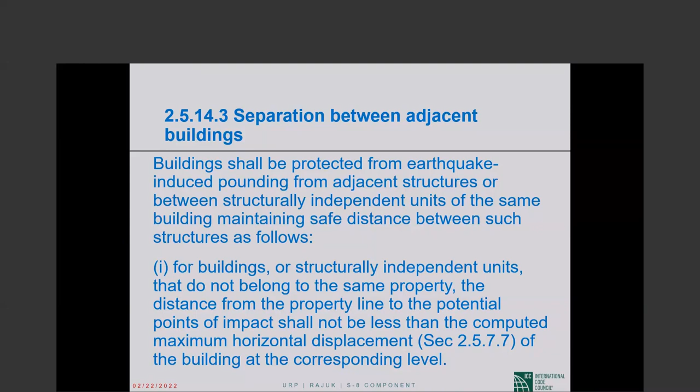The second item, for buildings or structurally independent units belonging to the same property, if the distance between them is not less than the square root of the sum of the squares of the computed maximum horizontal displacements of the two buildings or units at the corresponding level. So this is exactly the same as ASCE 7-10. Separation distance is square root of the sum of the squares of the deflection at the roof level of the shorter building and the deflection at the corresponding level of the taller building.

Now, this square root of the sum of the squares concept is in BNBC ahead of ASCE 7-10. I wanted you to see that. And once again, we are not talking about delta sub M1 of ASCE 7, including torsion. This is the horizontal displacement. It may not include torsion.

Then there is what I found the most interesting, and the reason that I thought that I had to show all of this to you is item number 3. If the floor elevations of the building or independent unit under design are the same as those of the adjacent building or unit - okay, please let me read that again - if the floor elevations of the building or independent unit under design are the same as those of the adjacent building or unit, the above referred minimum distance may be reduced by a factor of 0.7.

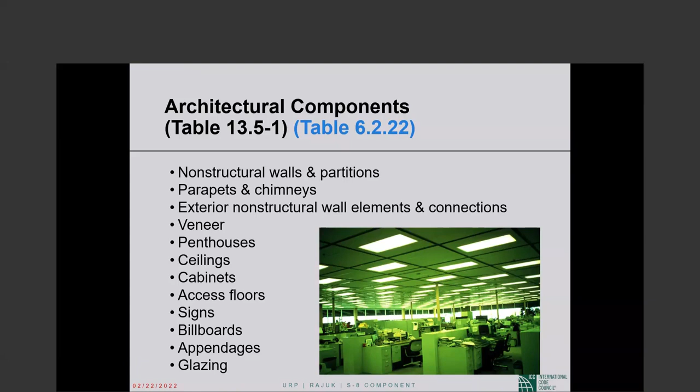The architectural components listed in Table 13.5-1 of ASCE 7 are listed because their design requires factors given in those tables. So these will give a good idea of what we're talking about: non-structural walls and partitions, parapets and roof-mounted chimneys, exterior non-structural wall elements and connections, veneer, penthouses, ceilings, cabinets if attached to the structure. Otherwise they're treated as furniture, which is typically not considered a non-structural component — it's when they're attached to or braced against the structure that we consider them. Also access floors, signs, billboards, appendages of various kinds, and glazing or glass, a very important architectural component.

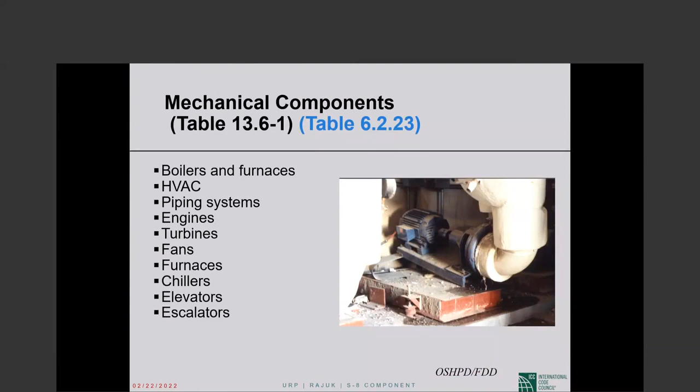Mechanical components are listed in Table 13.6-1, a very important table: boilers and furnaces, HVAC — heating, ventilating, air conditioning — which could be ducts, equipment, piping systems, engines, turbines, fans, furnaces, chillers, elevators, escalators, all of that are mechanical components. Electrical conduits, bus ducts, cable trays, and lighting fixtures are electrical components.

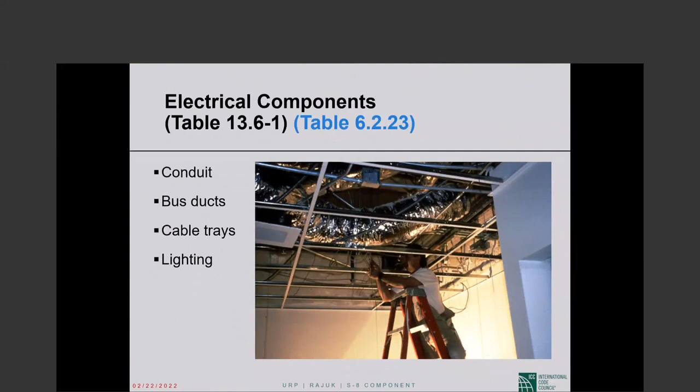For the purposes of Chapter 13 of ASCE 7, non-structural components shall be assigned to the same seismic design category as the structure they occupy or to which they are attached. So very simply, the seismic design category of the non-structural components is the same as that of the structure.

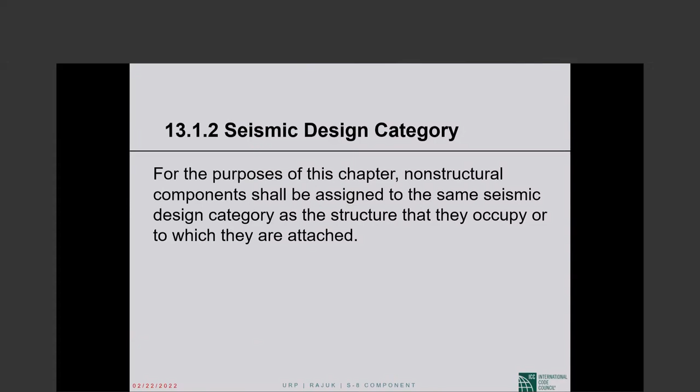Now, at the beginning of chapter 13 - and the same is true in BNBC, where it is 2.5.15 - there are a number of exemptions.

That's pretty much where the chapter starts, where the requirements do not apply. And that is a very important list, because it is only the other non-structural components that you need to design using chapter 13. So there is, to start with, a list of non-structural components that need not be designed using chapter 13 of ASCE 7, or 2.5.15 of BNBC 2020. This section establishes minimum design criteria for non-structural components that are permanently attached to structures, and for their supports and attachments.

So this is non-structural components permanently attached to structures - this is not furniture, as I said - and for the supports and attachments of those non-structural components. If they're attached to the structure, the attachment has to be designed.

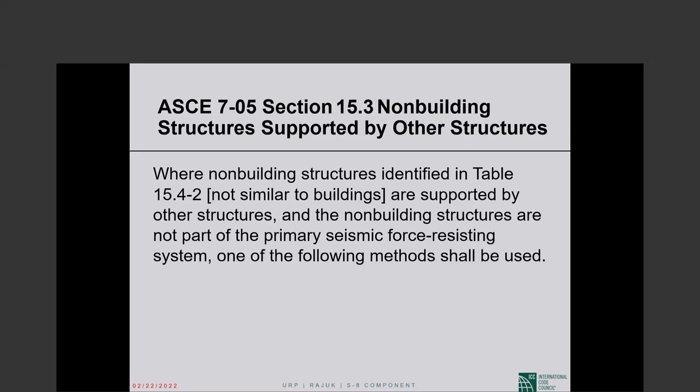So where non-building structures that are not similar to buildings are supported by other structures, okay, could be a chimney, and the non-building structures are not part of the primary seismic force resisting system, then one of the following methods shall be used. I'll take you only through the first part. The second part is a little too complicated, and I'll leave it to you to read if you're interested.

For the condition where the weight of the non-building structure, so we are talking about a non-building structure supported on another structure, is less than 25% of the combined weight of the non-building structure and supporting structure. Okay, this is the important part. Where the weight of the non-building structure is less than 25% of the combined weight of the non-building structure and supporting structure, the design seismic forces of the non-building structure shall be determined in accordance with Chapter 13.

See, this is where it sends you. Chapter 15 sends you to Chapter 13, where the non-building structure has a weight that is less than 25% of the combined weight of the, okay. So shall be determined in accordance with Chapter 13, where the values of R sub P and A sub P shall be determined in accordance with Section 13.1.5, which we looked at.

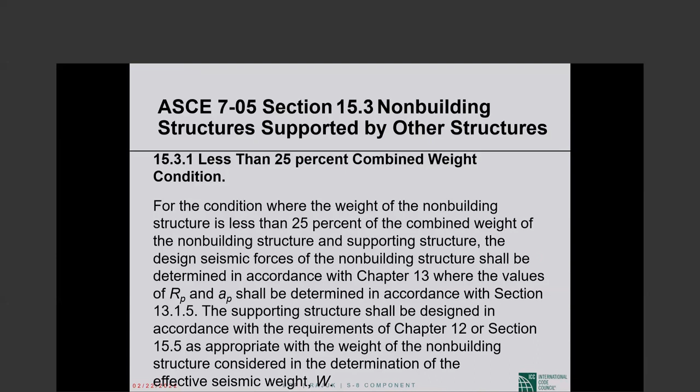Okay. Anyway, the rest of it may or may not be all that terribly important, and I will not take you through the case where the non-building structure weighs more than 25% of the combined weight.

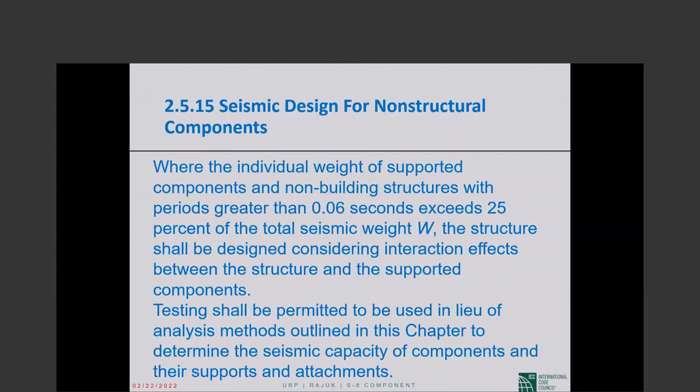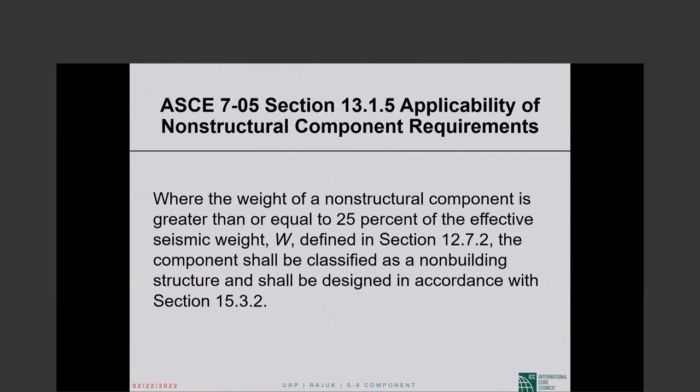So where the non-building structure weighs more than 25% of the combined weight, I will not take you through that, but there is provision for that. So I wanted you to see that, instead of this vague provision in BNBC 2020, ASCE 7 has very clear, distinct provisions for both non-structural components and non-building structures. And these are kind of interrelated, okay? I think that's probably enough on this topic.

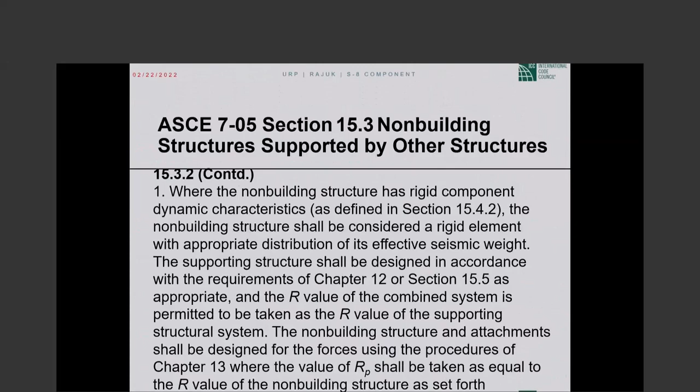But this is the exemptions are very important, and what I just took you through is also very important. You cannot start designing a non-structural component without figuring out if it is exempt, because then you'll be wasting time. And also you cannot start running numbers until you have figured out some of the things that we discussed. Is the non-structural component too heavy? In which case we may have to go to chapter 15 for our design, not chapter 13. Okay.

With those things settled, let us get into chapter 13, the non-structural component design chapter. So if you consider the exemptions, then what that leaves for us to design are parapets in design category B, all parapets, and architectural components in design category B when I sub P is larger than 1.

Okay, so in seismic design category B, the only architectural components that we need to design by chapter 13 are parapets and architectural components with I sub P larger than 1. If the design category is C, all architectural components must be designed by chapter 13. Electrical and mechanical components must be designed, but only if I sub P is larger than 1.

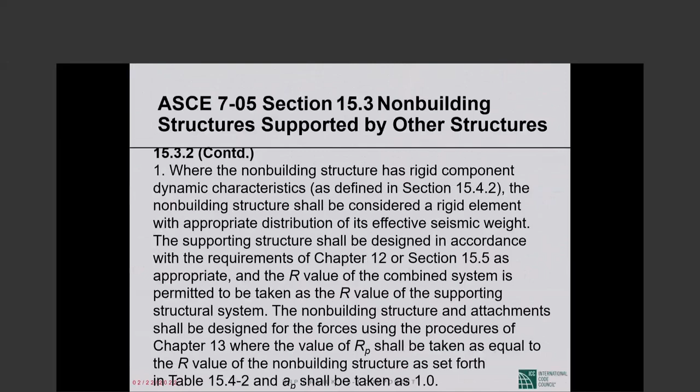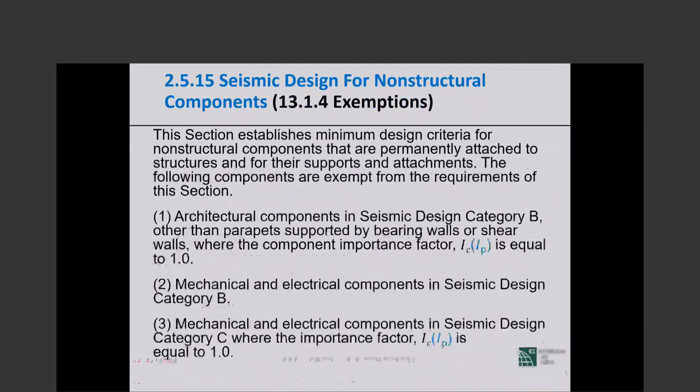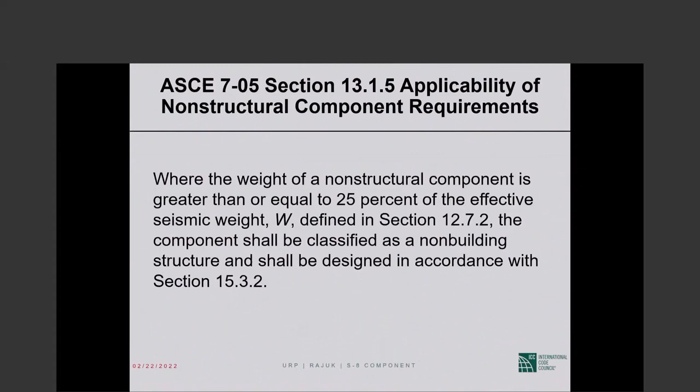Design categories D, E, and F: architectural, mechanical, electrical, all non-structural components basically always shall be designed by chapter 13. We say basically always because there were those exemptions 4 and 5, remember? These exemptions are there for the high seismic design categories, but those are not broad exceptions, those are kind of narrow. So this is why we are saying basically always.

So design category B, parapets have to be designed using chapter 13, other architectural components provided I sub P is larger than 1. Design category C, all architectural components, electrical, mechanical only when I sub P is larger than 1. Design categories D, E, and F, basically all architectural, mechanical, electrical components.

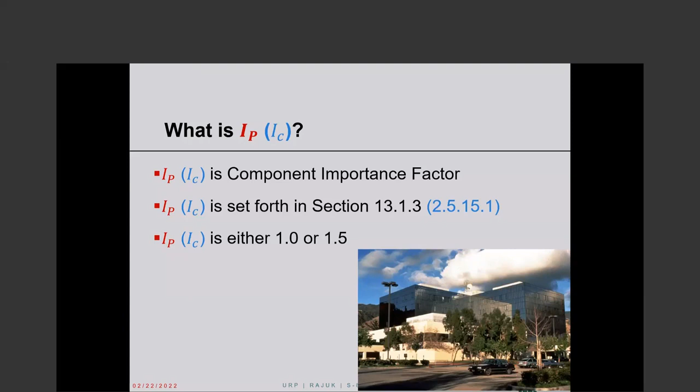Now the I sub P that keeps on coming up. Okay, I sub P, as you have seen, is very important. It dictates many times whether we have to design a component by chapter 13 or we can forget about design. So I sub P is component importance factor. It is given in section 13.1.3 of ASCE 7. I have given you the corresponding BNBC section number. I sub P is either 1 or 1.5. I for the structure can have 3 values, 1, 1.25, or 1.5. I sub P for parts and portions has only 2 admissible values, 1 or 1.5.

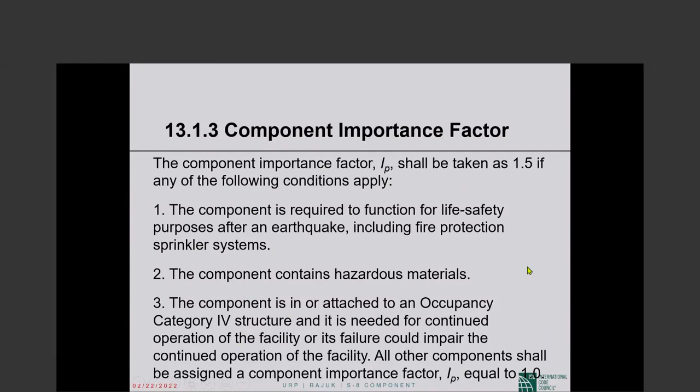And is needed for continued operation of the facility, or its failure could impair the continued operation of the facility. Okay, so 1, 2, 3, I sub P shall be taken as 1.5 if any of the following conditions apply. All other components shall be assigned an I sub P of 1. So I sub P is 1.5 when those conditions are met. It's not exactly essential facility, but the component is needed for continued functioning of a facility. The language is clear. Otherwise, I sub P is equal to 1.

What force do you need to design a component for? The component design force is F sub P. That notation is common between ASCE 7 and BNBC, F sub P. Maybe it is F sub C. Yeah, F sub C in BNBC. So the component design force is...

40% of S sub ds. S sub ds, remember, is short period design spectral acceleration. If we divide that by 2.5, or multiply it by 0.4, we get design level peak ground acceleration. This we have discussed many times before.

So we are talking about the peak ground acceleration multiplied by a dynamic amplification factor, A sub P, times the weight of the component, W sub P, divided by R sub P, component response modification factor, and I sub P is the importance factor we have been talking about. So it's basically 0.4 S sub ds times W sub P, the peak ground acceleration multiplied by the weight of the equipment.

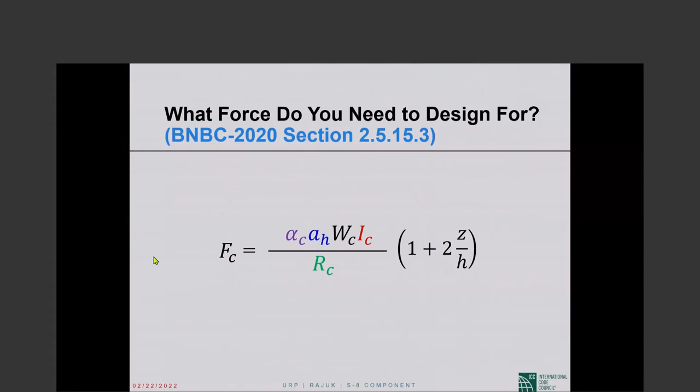Alpha sub C is the same as A sub P, the dynamic amplification factor. So A sub H takes the place of 0.4 S sub ds. That's what it boils down to. If you compare the two equations, alpha sub C is A sub P, W sub C is W sub P, I sub C is I sub P, R sub C is R sub P. And then 1 plus 2Z over H is the same as in the ASCE 7 formula, so this A sub H takes the place of 0.4 S sub ds.

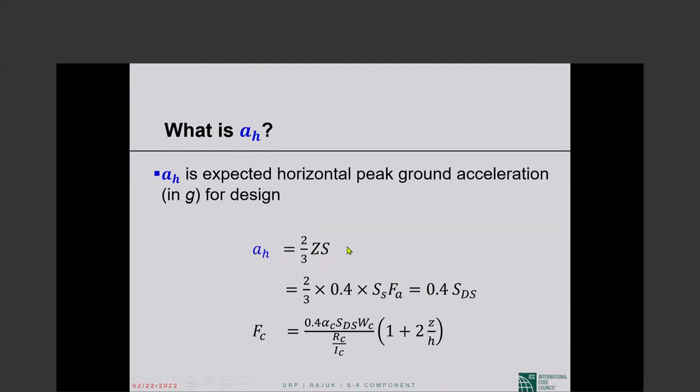And here I'm showing you that that is the case. A sub H, in fact, is equal to 40% of S sub ds. A sub H in BNBC is given by this expression, 2/3 Z times the soil factor S. The soil factor S of BNBC is F sub A of ASCE 7, and Z is 40% of S sub S. Z is MCE level acceleration. This is why it is 40% of S sub S, not S sub ds. So 2/3 of Z, which is 40% of S sub S, times the soil factor S, which is the short period site coefficient F sub A, and all of that, 2/3 of S sub S times F sub A is S sub ds. So A sub H is actually equal to 40% of S sub ds.

So there is absolutely no difference between the BNBC formula and the ASCE 7 formula. If you remember that alpha sub C is A sub P, and in all other cases, the subscript C is the subscript P of ASCE 7.

So what is A sub P? That's the dynamic amplification factor. It is given in Table 13.5-1 for architectural components and Table 13.6-1 for mechanical and electrical components. R sub P is given in those tables, and A sub P is also given in those tables, 13.5-1 for architectural, 13.6-1 for mechanical and electrical. A sub P is either 1 or 2.5, with just one exception, just so that you know. There is either no dynamic amplification or significant dynamic amplification, 1 or 2.5, with one exception.

I did not reproduce Table 13.5-1; it is easy enough for you to look up. I think I gave you the corresponding BNBC table number.

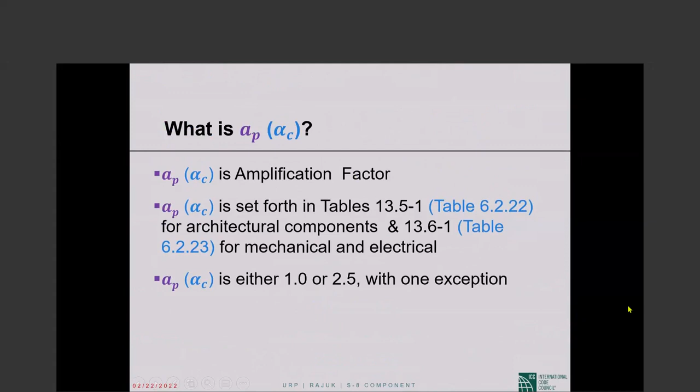Anyway, that's where it comes from, and it is 1 or 2.5. That's obviously important.

Okay, now we will discuss the variation along height that we, in a way, already discussed. So at the base of the structure, the peak acceleration is 40% of S sub ds. I said base of the structure, technically 40% of S sub ds is at the ground level.

Base is a defined term in ASCE 7. This is where seismic forces are imparted to the structure. Seismic ground motion is imparted to the structure. This is how it is defined. It is up to the engineer to decide what the base of his structure is.

Now, if it is a structure on level ground, the ground level is typically chosen as the base. But 40% of S sub ds is peak ground acceleration, and that would typically be the acceleration at the base.

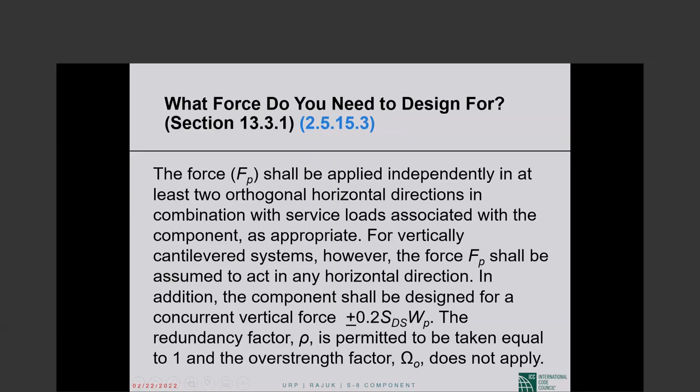It's a vertical force. The redundancy factor rho is permitted to be taken equal to 1, and the overstrength factor omega sub 0 does not apply. Read this and keep this in mind. What you are designing will dictate exactly how you implement that requirement.

Where non-seismic loads on non-structural components exceed F sub P, such loads shall govern the strength design. So let's say on a parapet you have out of plane wind, you have the F sub P acting out of plane. The wind may very well govern in high wind areas, and you will design for strength required for the wind, no question about it.

So where non-seismic loads on non-structural components exceed F sub P, such loads shall govern the strength design, but the detailing requirements and limitations prescribed in this chapter shall apply. And this is like structure. The strength will have to be whatever requires the strength, but if your seismic design category is high, it will require the detailing.

Okay, so component design force. I hope the requirements are clear. It's actually conceptually without any complication, as far as I'm concerned.

40% of S sub ds is the peak ground acceleration, design level peak ground acceleration. We multiply that by the weight of the component. So mass times acceleration is a force. That's what we get. We have our component design force. That's the basic part: 40% S sub ds W sub P.

Now there is a possible dynamic amplification depending upon what we are designing. Dynamic amplification would be like higher mode effects. And there is the possibility of a response modification factor if the response is going to be inelastic. That's where A sub P and R sub P come from.

I sub P makes sure that we design important components for higher force. It's that simple. If a component is going to be needed for fire recovery after an earthquake, we better design it for 1.5 times the force that we would use in the design of ordinary components.

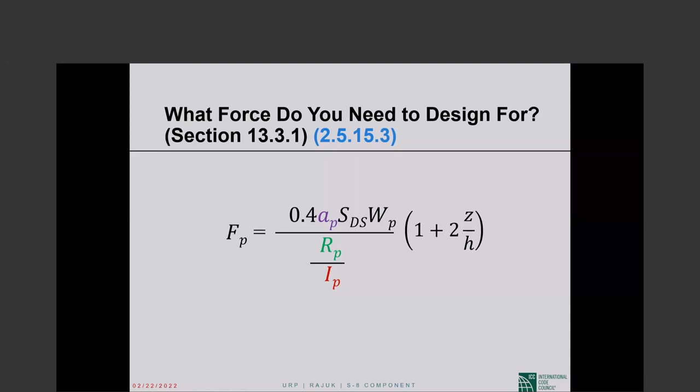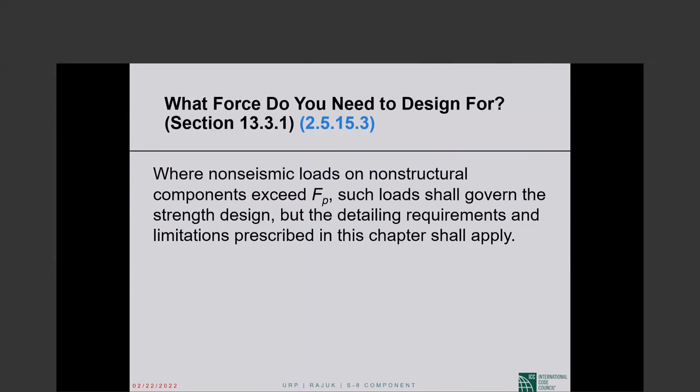Okay, so the equation makes basic sense. The A sub P and R sub P are given in tables, making it easy. And I sub P determination we have talked about. So there is not much else that is in ASCE 7 or BNBC.

Now that is the force. There are some things like piping and so forth where the component design force is not important. What is important is seismic relative displacement that has to be accommodated by the piping or whatever we are designing. The effects of seismic relative displacements are required to be considered.

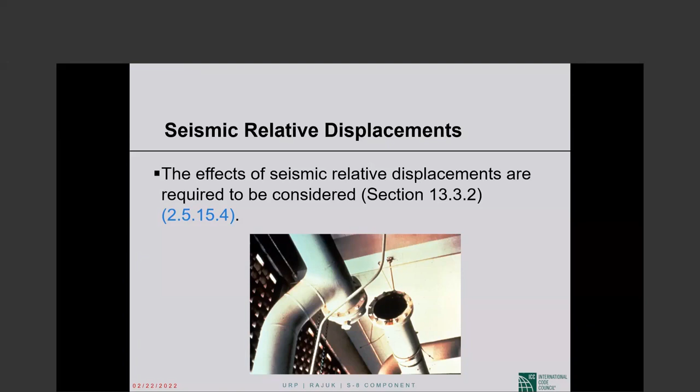That's what section 13.3.2 of ASCE 7 says, and the corresponding section number in BNBC is that. So this is that section 13.3.2. The effects of seismic relative displacements shall be considered in combination with displacements caused by other loads as appropriate. So it's not only seismic that may cause displacements, other loads may also, so in combination with displacements caused by other loads.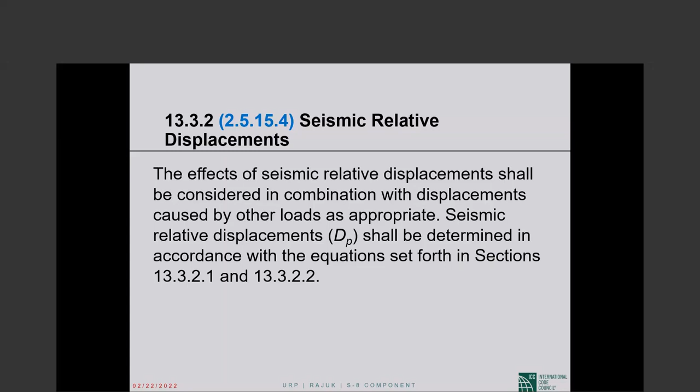Seismic relative displacements, the notation is capital D sub P, shall be determined in accordance with equations set forth. Okay, so equations are given for D sub P. This is very likely D sub C in BNBC. Okay, so please follow this.

So for 2 connection points on the same structure A, piping or whatever we are designing is attached to the same structure at 2 connection points. For 2 connection points on the same structure A or the same structural system, one at a height h sub x and the other at a height h sub y, this one should have a subscript. D sub P shall be determined as delta sub x A minus delta sub y A. A is for the structure. So D sub P is delta sub x minus delta sub y, as simple as that.

For 2 connection points on the same structure, one at a height h sub x, the other at a height h sub y, D sub P shall be determined as delta sub x minus delta sub y.

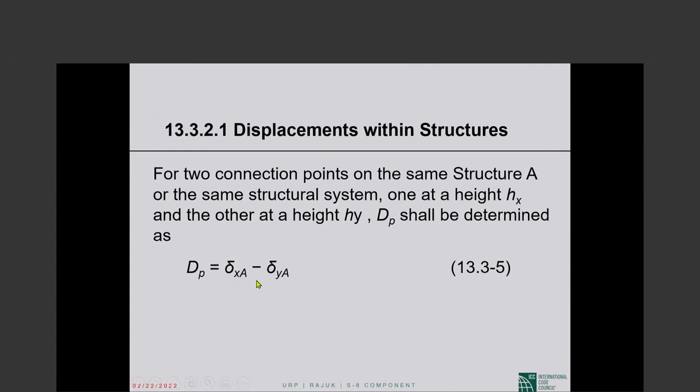For two connection points on separate structures A and B, one at a height H sub X and the other at a height H sub Y, D sub P shall be determined as the absolute value of delta sub X, which is on structure A, and delta sub Y, which is on structure B. So the attachment point at H sub X moves, the attachment point at H sub Y also moves. We take the horizontal movements and sum them up. Absolute values, because the movement is in both directions, so we add the absolute values of the two together.

This D sub P need not be any larger than, same thing: we take the deflection limit, the allowable interstory drift, divide that by the story height, and multiply by H sub X, the height to where the first attachment is. Similarly, we take delta sub aB, the allowable story drift of structure B, divided by the story height, multiplied by the height to the point where the second attachment point is.

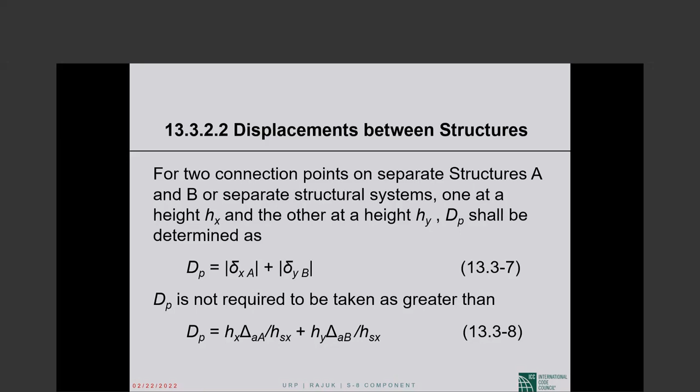I think if you read this, it will be clearer than I was probably able to make it. I think everything makes sense when you read it.

So a component has to be designed for the force that we looked at. Depending upon the component, a more critical consideration may be that you have to accommodate the relative displacement D sub P, which becomes important when you design glazing or glass. That relative displacement has to be kept within tolerable limits given in ASCE 7. So whether force or displacement is more important depends on what you are designing.

And then the attachment of the non-structural component to the structure, that is obviously important. You have to design that attachment as well. This is section 13.4 in ASCE 7, and 2.5.15.2 in BNBC. I took the first two lines from BNBC because it's simpler, and then the ASCE 7 language, which is very similar. Components shall be attached such that the component forces are transferred to the structure. Very simple, conceptually and practically, that's what we have to do.

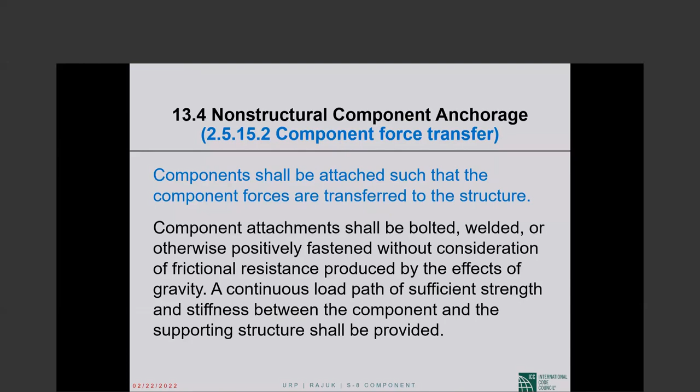The section goes on, and this part may be a little less simple to quickly follow. Local elements of the structure on which the component is attached, it could be anything, but it is not the main columns, beams, or shear walls. Local elements of the structure, including connections, shall be designed and constructed for the component forces where they control the design of the elements or their connections. It's not always that the force is controlling, it could be deformations, but anyway the component forces shall be those determined in the relevant section.

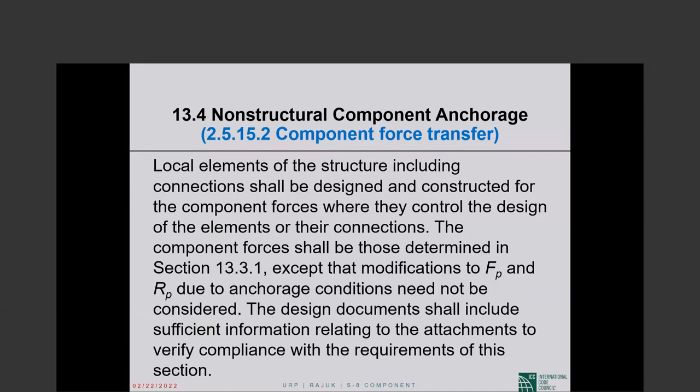We looked at that, except that modifications to F sub P and R sub P due to anchorage conditions need not be considered. So you take the component forces calculated from the formula I showed you, and modifications to F sub P and R sub P due to anchorage conditions need not be considered. The design document shall include sufficient information relating to the attachments to verify compliance with the requirements of this section. This may require more than one reading, but there is nothing I think that is confusing.

Section 13.4 continuing, this is a subsection on design forces. The force in the attachment, we are talking about attachment in 13.4, attachment design. Remember, the attachment will transfer the force from the component to the structure. That's where we are. The force in the attachment shall be determined based on the prescribed forces and displacement for the component determined. So the component design force or the component design displacements will tell us what the attachment design force is.

ASCE 7-10. This language is in ASCE 7-10 as well. ASCE 7-10 has added except that R sub P shall not be taken as larger than 6. So the force in the attachment shall be determined based on the prescribed forces and displacements for the component, from earlier provisions, except that R sub P shall not be taken as larger than 6.

The next subsection, very important under attachments, is anchors in concrete or masonry. Masonry I have not reproduced, but the subsection on anchors in concrete, ASCE 7-05 has 4-5 provisions. If you read them, you are liable to be confused. And then in ASCE 7-10, we switch to this requirement.

Anchors in concrete shall be designed in accordance with Appendix D of ACI 318, the Anchorage Appendix. Anchoring to Concrete is the title of Appendix D. So that takes care of everything that ASCE 7-05 was telling us to do. This is a very, very important requirement when you attach a non-structural component to a structure. The anchors shall be designed using ACI 318 Appendix D, and that will give you ductile anchor failure.

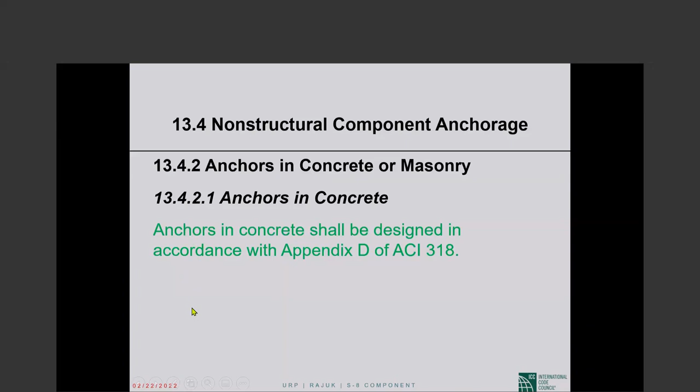ACI insists on the steel failing rather than concrete in anchor design, and the steel failure has to be ductile failure. There are a couple of alternatives to that, but anyway, that kind of failure mode is very, very important. So this to me is an extremely important requirement, that the anchors must be designed by ACI 318. Now, beyond anchor design forces,

anchors in concrete or masonry, there are other provisions that you need to look at in ASCE 7: installation conditions, multiple attachments, power actuated fasteners, and even friction clips. And there is good commentary on friction clips with a picture - good ASCE 7 commentary. So as far as anchorage of non-structural components, there is quite a bit said in ASCE 7-05.

In ASCE 7, a big item is special certification. I didn't quite find it in BNBC - that doesn't mean it is not there, I may not have found it. Special certification is required for many equipment. Anyway, let's look at this.

Hospital equipment - a hospital will not buy equipment that does not have special certification on it. It's as simple as that. So this is a very important requirement of ASCE 7 that is adopted by the IBC and practiced across the United States.

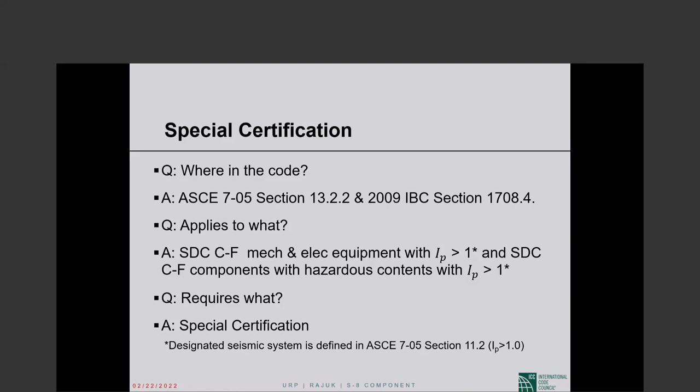Anyway, so what it boils down to is what we said here. What do you need special certification for? Design categories C through F, mechanical and electrical equipment with I sub P larger than 1. Design categories C through F components with hazardous contents, I sub P larger than 1. So what is required special certification? What basically is this special certification?

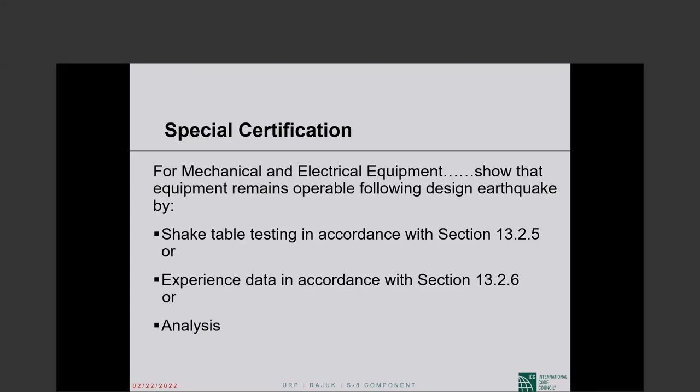For mechanical and electrical equipment, show that equipment remains operable following design earthquake, and this showing has to be by shake table testing in accordance with such and such, experience data in accordance with 13.2.6, or analysis. So the basis can be shake table testing, experience data that would be acceptable to the building official, or analysis. Analysis choice is kind of restricted - you cannot always use it. But anyway, the purpose of the shake table testing and so forth is to show that the equipment remains operable following design earthquake. The special certificate will state exactly that.

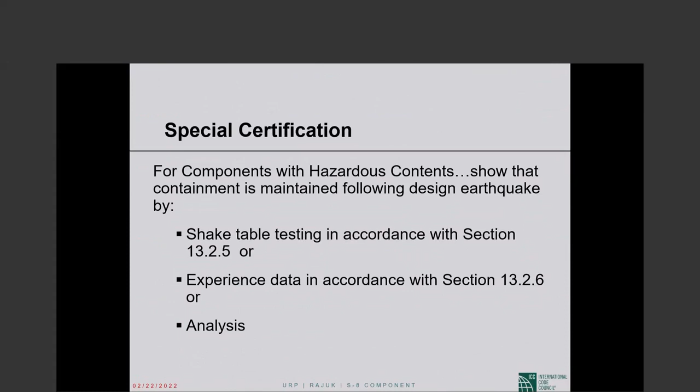For components with hazardous contents, show that containment is maintained. The material will remain contained following design earthquake. And you shall also show this by shake table testing or experience data or analysis.

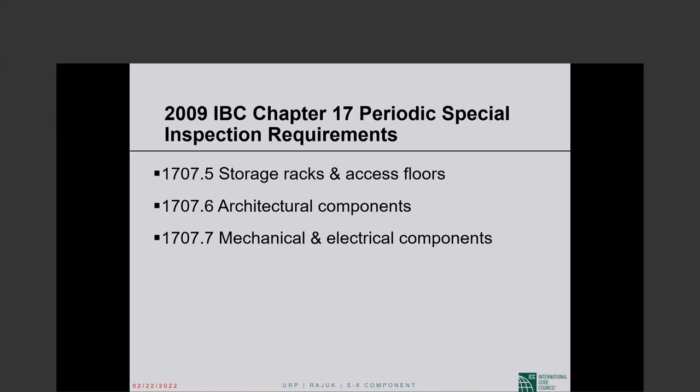I have given you IBC section numbers. Those are 2009 IBC section numbers, so you can see what the requirements are. So it is a pretty comprehensive package.

Beyond the general requirements—the design force, the relative displacement, the tables giving us A sub P, R sub P—there are specific requirements for many non-structural components in chapter 13 of ASCE 7.

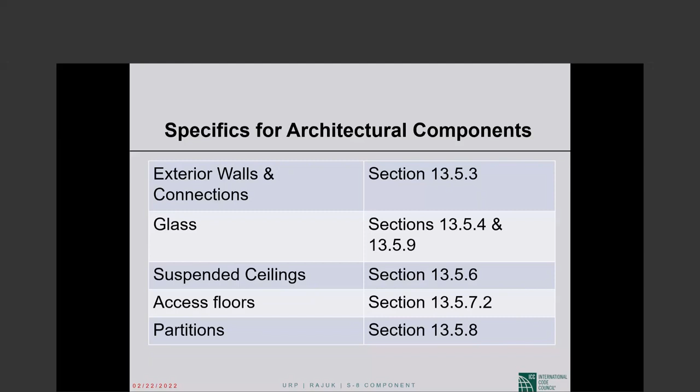Those things for which we have specific provisions are exterior walls and connections, glass, suspended ceilings, access floors, partitions. Those are all architectural components. Mechanical and electrical components for which we have specific provisions printed in ASCE 7 are utility and service lines, HVAC ductwork, piping systems, boilers and pressure vessels, elevators and escalators.

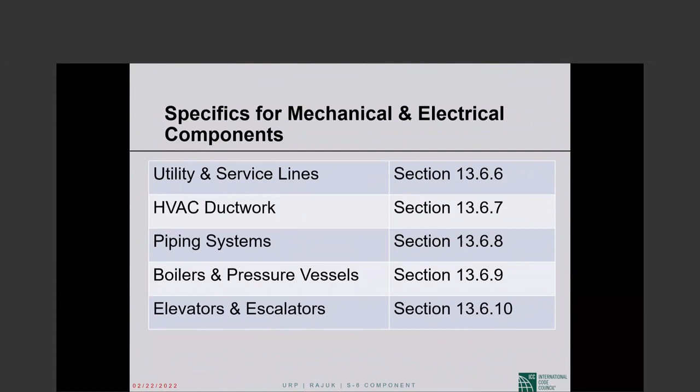Okay, so that brings us to a point that is, I think, very logical for our break. So we will come back at 9:35 precisely and go into the non-building structures. Okay.

Dr. Ghosh? So I think you will finish quite early today because there's not much left after this, right? I don't know, we'll see. Could happen, it should be good. Then I was thinking I will leave the question and answers for you today. Oh, whatever you like. I don't know, how many slides left? Let me check, there are not many slides left after this. Yeah, anyway, if it is early that would be good. Yeah, I think 29, 30 slides. It probably won't be that early, but probably a little early. Yeah, okay.

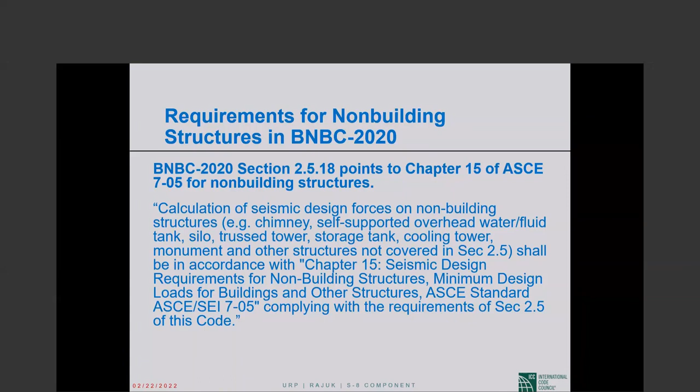So ASCE 7 chapter 15 is where you are being asked to go to, complying with the requirements of section 2.5 of this code. When it comes to design, there is no difference between section 2.5 and ASCE 7 anyway. In other words, BNBC directs you to chapter 15 of ASCE 7.

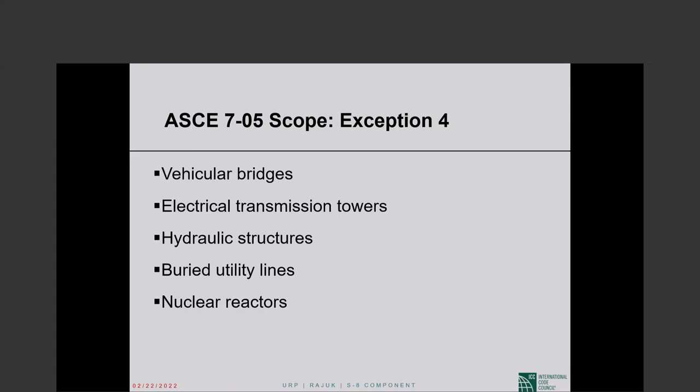As I said, non-building structures are put into one of two categories: non-building structures similar to buildings, or non-building structures not similar to buildings. The non-building structures similar to buildings utilize seismic force resisting systems that are listed in table 12.2-1. A very common example are the pipe racks that you find in all kinds of plants.

The racks are quite often made of concrete. In this case, it is precast, but they don't have to be precast. The important thing is these are frames, the same frames that are listed in ASCE 7 table 12.2-1. If your seismic design category is D, these frames will have to be special moment frames—none of that goes away. So the fact that the seismic force resisting system is moment frames makes this non-building structure similar to buildings.

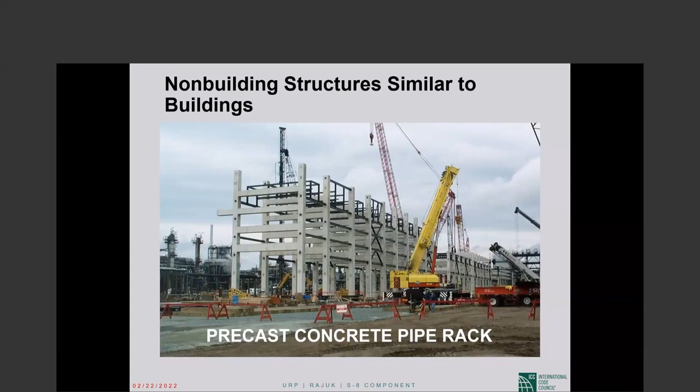The many water tanks or liquid retaining tanks that are all around us—well, definitely from the outside, we wouldn't know what the seismic force resisting system is. And seismic forces may very well be resisted by systems that are not listed in table 12.2-1. So these are non-building structures not similar to buildings.

Basically, non-building structures similar to buildings are treated like buildings for most practical purposes. We design them as we would design a building, with some modifications and additions that we will talk about, made in chapter 15.

Non-building structures not similar to buildings have specific provisions for many of them in chapter 15. Something like liquid retaining tanks, the provisions have now... it's difficult to pinpoint when the beginning was, but let's say the Uniform Building Code of the 80s had very little to nothing on non-structural components, non-building structures.

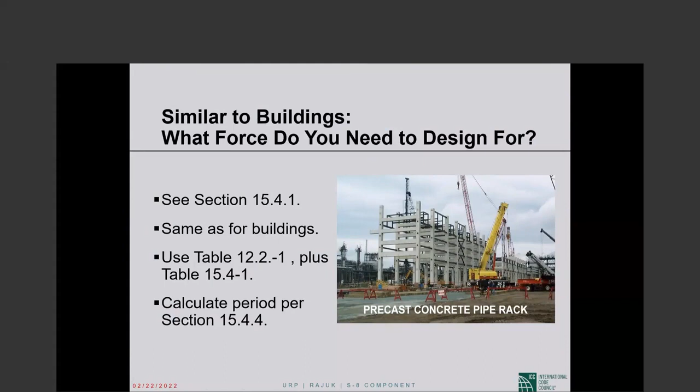In this table, that applies to non-building structures similar to buildings, we have done something that is not done anywhere else in ASCE 7. There is a trade-off allowed between height limit and R value. Okay, let me try to explain.

So the system here is ordinary steel concentrically braced frame, ordinary as opposed to special. The usual R value is 3¼, omega sub 0 is 2, C sub D is 3¼. No height limit up to design category C, but then 35 feet only for design categories D and E, and not permitted in design category F.

Now you can definitely use that line, but then you have to deal with a 35-foot height limit in design category D. That may not serve your purpose. So we are being offered two alternatives. You can take the penalty of using R of 2½ rather than 3¼ — that will increase your design force. So your new set of parameters should be R of 2½, omega sub 0 of 2, and C sub D of 2½.

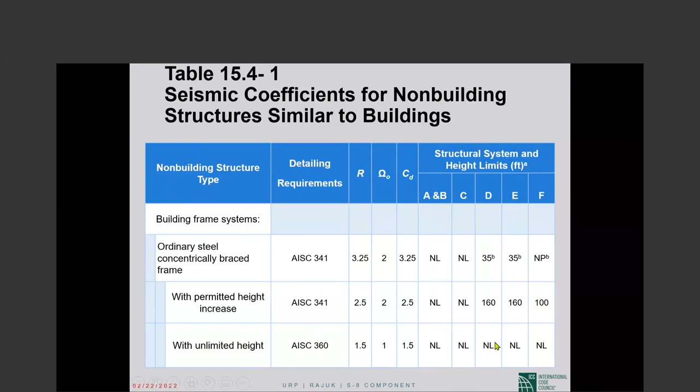Similar trade-offs are allowed for intermediate steel moment frames, intermediate reinforced concrete moment frames, ordinary moment frames of steel, and ordinary reinforced concrete moment frames. So those are the 5 systems, the concentrically braced frame and these, for which the trade-off is allowed. But with, for instance, the intermediate reinforced concrete moment frame, to get to unlimited height, your R value has to be 0.8, below 1.

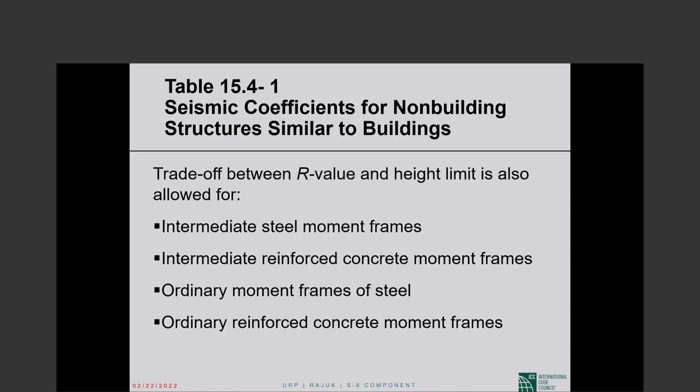So please take a look at this table 15.4-1. Very interesting table. Interesting things are happening in there, not similar to buildings.

So you still have to look at 15.4.1, where it directs you. The R, omega sub 0, and C sub D now come from table 15.4-2.

And the design base shear equations are the same, but the minimums are not the same, as I'll show you. And the period calculation cannot be this - it is not the same as for buildings. Basically, you cannot use the approximate period that we use in building design. That is not allowed by chapter 15.

So these are the design base shear equations that you are all familiar with by now. This is the descending branch, period dependent. This is the upper bound. This is the constant displacement part of the spectrum starting at T sub L. Now the...

Lower bound - remember 0.044 S sub ds times I times W, but never any lower than 0.01. Here it is 0.03. This is a much higher minimum.

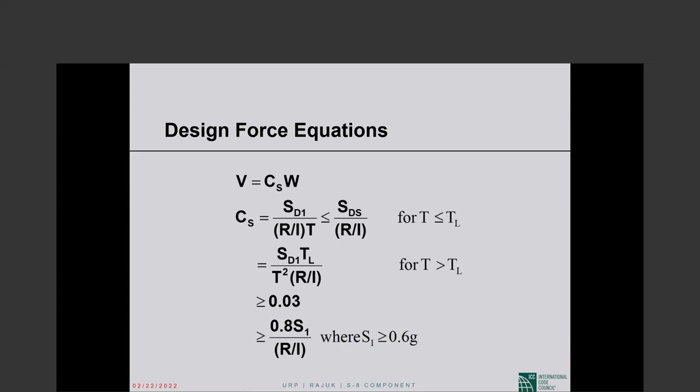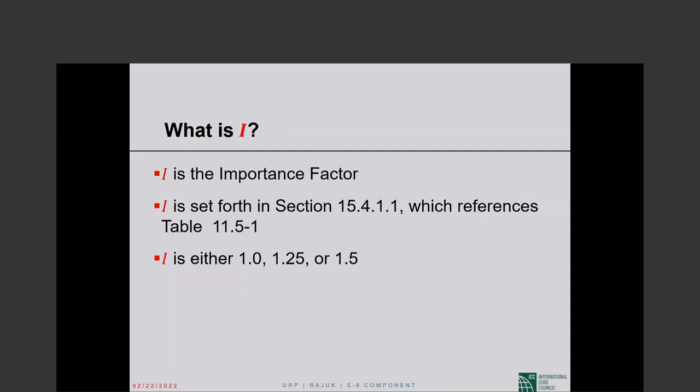For non-building structures, we use I, not I sub P. I is the importance factor. It is given in section 15.4.1.1, which references table 11.5-1, where the seismic importance factors are given for structures. I is either 1, 1¼, or 1½, as for building structures. No difference. This is not I sub P.

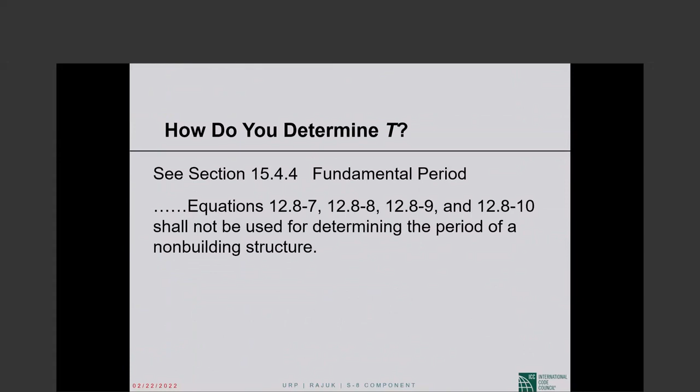Period computation. How do you determine T? The approximate period formulas do not apply. That's pretty much what this is saying. So this is the requirement for period determination for non-building structures.

The fundamental period of the non-building structure shall be determined using the structural properties and deformation characteristics of the resisting elements in a properly substantiated analysis. The eigenvalue analysis that we talked about involves stiffness assumptions as indicated in section such and such.

Alternatively, you can use the Rayleigh-Ritz formula. Many of us are kind of familiar with this, and I don't think I showed you an example. Anyway, this is reasonably easy to use. The W sub I, delta sub I, F sub I are explained here.

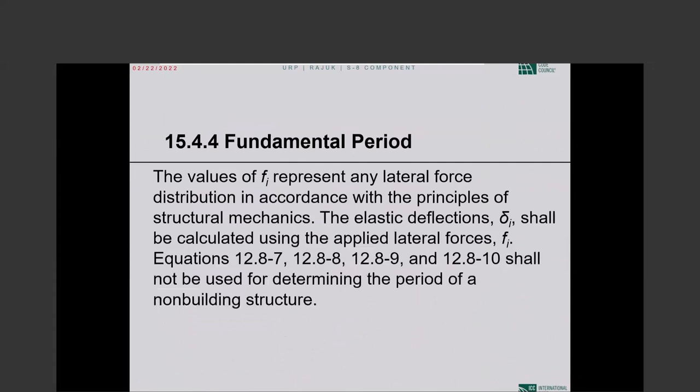The values of F sub I represent any lateral force distribution in accordance with the principles of structural mechanics. We typically take the design base shear distributed according to the code prescription, but you don't have to. As it says, it can be any lateral force distribution in accordance with the principles of structural mechanics. You shouldn't have a high force at the base and a low force at the top - that is not in keeping with the principles of mechanics.

Anyway, the F sub I are the forces, delta sub I are the displacements obtained for those forces from elastic analysis, and what else was involved? F sub I, W sub I - W sub I are the seismic weights at the various floor levels.

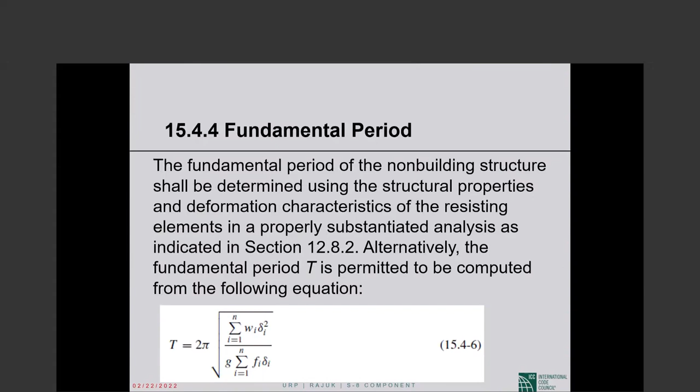So the main thing is the approximate period formulas are not allowed. It has to be rational period determination, which you can do on the computer using eigenvalue analysis, as we call it, or if you want to do simple hand calculation, it is the Rayleigh-Ritz formula that you can use. When I say hand calculation, the delta sub I has to come out of analysis, but then you can find the period by basically manual calculation.

The particular non-building structures for which ASCE 7 chapter 15 gives you provisions are pipe racks. These are all important, very important things.

Steel storage racks, electrical power generating facilities, towers supporting tanks and vessels, piers and wharves that are accessible to the public. If those are private piers, then they're not covered by ASCE 7.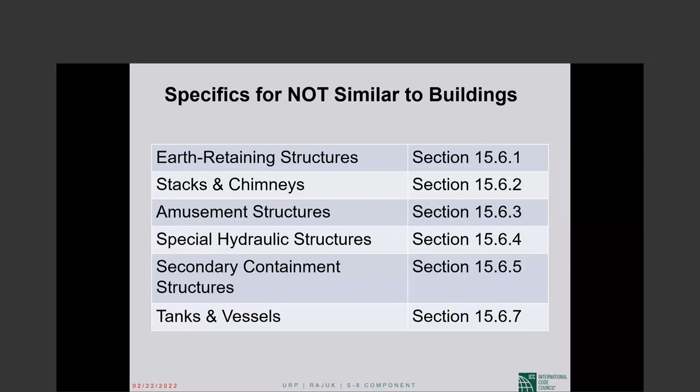Specific items covered in ASCE 7-05 that are not similar to buildings: earth retaining structures, stacks and chimneys, amusement structures, special hydraulic structures, secondary containment structures, tanks and vessels. That's the section I was telling you has grown to the point that I can't even believe.

There is a section on drift limitation for non-building structures. The drift limitations of section 12.12.1 for buildings need not apply to non-building structures if a rational analysis indicates they can be exceeded without adversely affecting structural stability, or attached or interconnected components and elements such as walkways and piping.

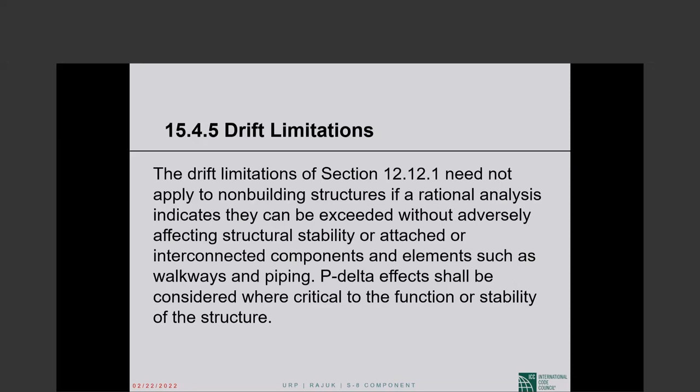Without adversely affecting attached or interconnected components and elements such as walkways and piping - if you can show that large deflections will not have an adverse impact on walkways and things, then the drift limit for buildings does not apply. P-delta effects shall be considered where critical to the function or stability of the structure.

Okay, this is not the final segment. I have a little example at the back, which I probably should have put after the non-structural component section, but anyway it doesn't matter. Let us look at this.

What is it - a non-structural component or a non-building structure? Quite often it's not that clear-cut. Susan Dowty, who worked with me for quite a while, wrote a paper some years ago with Bob Bachman, who is one of the authorities in this field. Much of what you see in ASCE 7-05 for non-structural components in particular is because of Bob. Anyway, the two of them together wrote a paper, and these slides are basically out of that paper, to provide an idea to engineers on this important topic.

Non-structural component or non-building structure - so non-structural components covered by chapter 13, the specific items are listed here, and there are a lot.

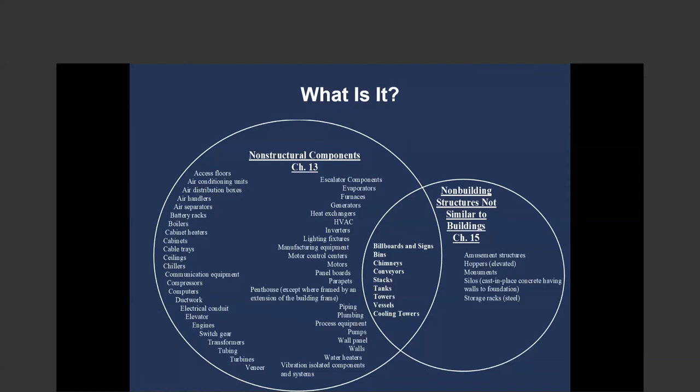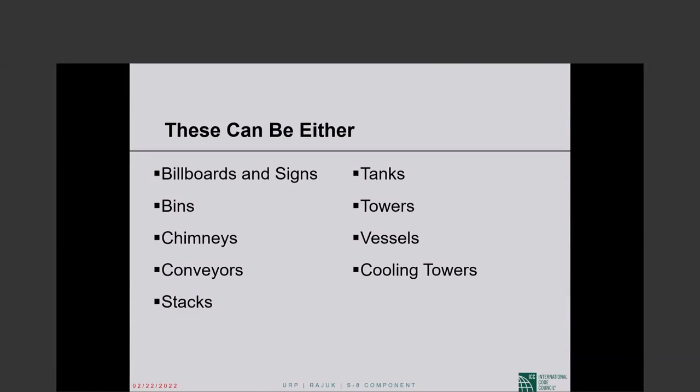The question is about this intersection: chimneys, conveyors - they can be non-structural components or non-building structures. So these can be either. Billboards and signs, bins, chimneys, conveyors, stacks, tanks, towers, vessels, cooling towers.

So what are some of the differences between non-building structures and non-structural components? Susan thought a warning should be issued to the viewers: what you are about to see is for guidance only. Generalizations have been made, and generalizations do not always apply. In applying this guidance, or any guidelines actually, common sense is necessary. So these are definitely not hard and fast rules - just suggestions to set you on the right path.

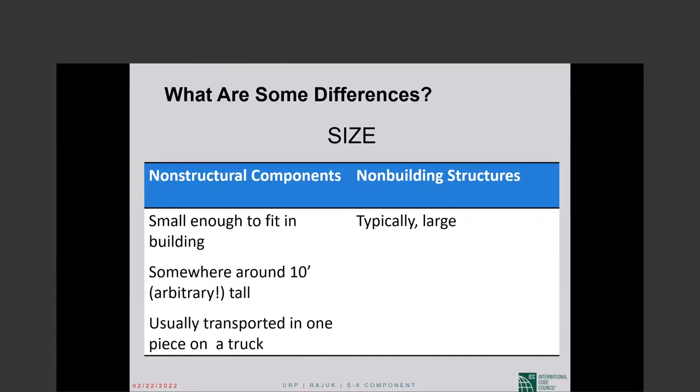So what are some of the differences based on size? Non-structural components are small enough to fit in a building, somewhere around 10 feet tall - the 10 feet is totally arbitrary - usually transported in one piece on a truck. Non-building structures are typically large, not always, but typically.

The designer always has the option of calculating both ways - you can take the same thing as a non-structural component designed by chapter 13, then redesign the same thing as a non-building structure by chapter 15, and take the more conservative answer. That is always a choice, though I do not know that too many people exercise this choice.

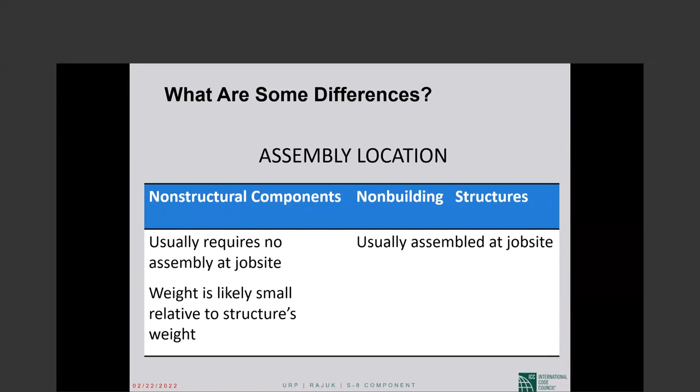Going on with differences based on assembly location: a non-structural component usually requires no assembly at the job site, and its weight is likely small relative to the structure's weight. A non-building structure, on the other hand, is usually assembled at the job site, largely because of their size.

Differences based on construction, or basis for construction: the usual function of a non-structural component is for architectural, mechanical, or electrical purposes, as we know. Non-building structures are usually constructed to resist gravity and lateral loads, and also to maintain structural integrity. I don't know how useful that was, but a lot of people have told us good things about that paper, so I thought it might be of interest.

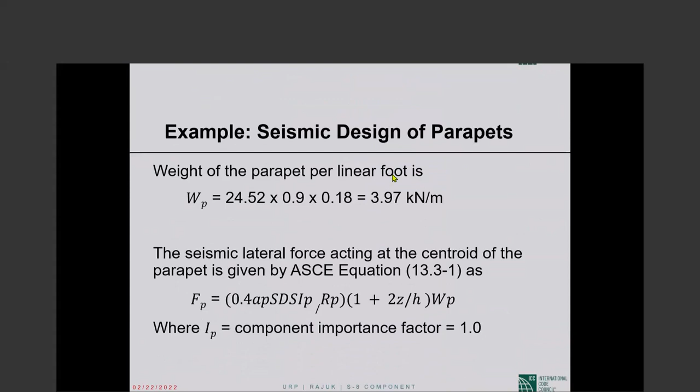Weight of the parapet per linear foot is 24.52, 0.9, 0.18. I don't know that everything is presented in the problem statement. Let me see.

No, I did not give you the other details. Okay, so accept that to be the weight, 3.97 kilonewtons per meter of this parapet.

The seismic lateral force, which would act at the centroid of the parapet, is given by an equation such as F sub P equal to... I corrected these things last night. It is A sub P, S sub ds, I sub P divided by R sub P, 1 plus 2z over h, times w sub P. You have looked at that equation a number of times. We will use that equation now.

Our I sub P is equal to 1. It's a parapet, it doesn't serve any essential purpose. S sub ds is 50% of G, that is kind of part of the problem statement. W sub P, weight of the parapet, is a calculated value, although I didn't give you the details needed for the calculation: 3.97 kilonewton per meter.

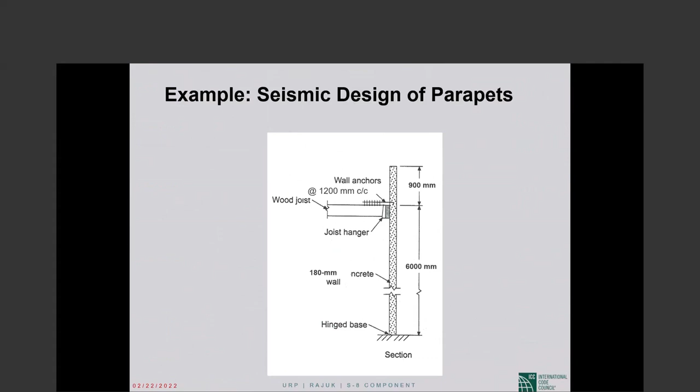The H, height of roof above the base, is 6 meters. That was given in the problem statement. This 6,000 millimeters here, okay, so that is H.

And Z, remember, is height to the location where the component is attached. The parapet is attached to the structure at the roof level, so our Z is also equal to H, also equal to 6 meters. This is like a roof mounted equipment - the parapet is mounted on the roof or attached to the roof.

R sub P, component response modification factor. If you go to table 13.5-1, where we found A sub P of 2.5, the R sub P is also 2.5. So now we have everything that goes into this equation.

0.4, S sub ds is 0.5... what was before point... 0.4 A sub p, S sub ds, I sub p. So 0.4 times A sub p of 2.5, S sub ds is 0.5, I sub p is 1, divided by R sub p of 2.5, and then 1 plus 2 times z over h. Z is 6 meters, h is 6 meters, times w sub p.

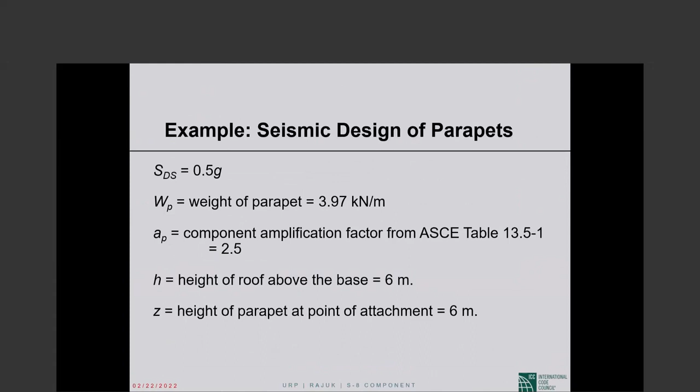All of that gives us 60% of the weight. The weight we said is 3.97 kilonewton per meter, so 60% of that would be 2.38 kilonewton per meter.

There is a minimum on the F sub P below which you cannot go, and there's a minimum and maximum, remember, so those simply do not govern. So the governing F sub P is 2.38 kilonewton per meter.

This acts at the center of mass of the parapet, and the parapet is 900 millimeters tall, so the center of mass is half of that above the roof. That is 0.45 meter times the 2.38 kilonewton per meter, gives us 1.07 kilonewton meter of moment per meter length of the parapet. So for a 1 meter strip of the parapet, the bending moment at the roof level is 1.07 kilonewton meter.

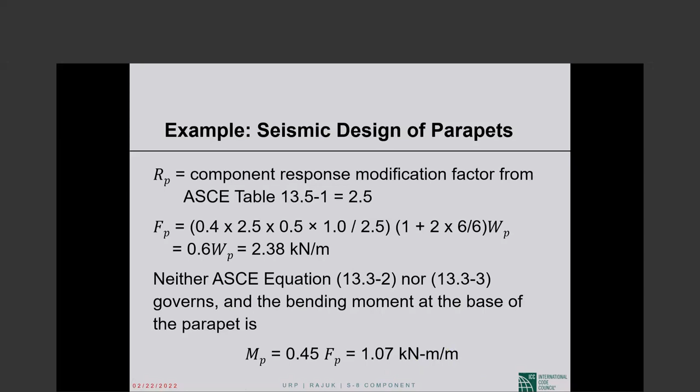So it's a very simple example. At the same time, I think it shows you application of the F sub P formula, which has multiple components in it.